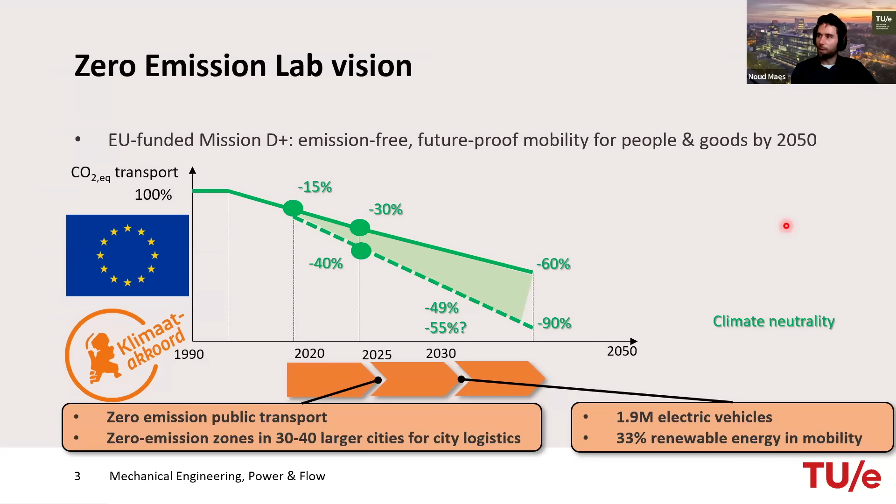I think it is relatively clear for most of us what our goal is here. In our zero emission lab, we have the vision that aligns with the EU-funded Mission D+, which is emission-free, future-proof mobility for people and goods by 2050. That is associated with several targets, among which are zero-emission public transport, but also zero-emission zones in larger cities. That goes hand in hand with the introduction of electric vehicles, of course, but also renewability of energy in mobility.

Associated with that, specifically for heavy duty transport, we need to look at sustainable fuels in order to achieve those goals. In our lab, we have something that we coin ICE 0.0 - internal combustion engines 0.0 - where we focus both on zero impact greenhouse gas emissions as well as zero impact pollutant emissions. For the greenhouse gas emissions, you have to look at the fuel side. You want to avoid fossil carbon - that's what you want to avoid in order to have zero impact greenhouse gas emissions. That means we look at either hydrogen and ammonia as carbon-free fuels, or advanced biofuels and advanced electrofuels, fuels generated by renewable electricity, from the fuel perspective.

On the other side of the coin, we have the zero impact pollutant emissions. That's partially related to the fuel again, but also largely based on the engine that you're using. That means, of course, that we're targeting zero impact NOx, soot, unburned hydrocarbons, and CO emissions. We believe that the way to do this is to use a combination of ultra-efficient internal combustion engines and sustainable fuels, to accelerate the greenhouse gas emission reduction in heavy-duty transport.

Some of the key scientific challenges associated with this are the formation of mixtures inside the cylinder, but also to shape the heat release inside the engine and to control this heat release as a function of time. In addition, we also believe that we need to have certain fuel flexibility in order to meet up with specific supply and demand.

The way we do that in our zero emission laboratory - this is an initiative which is joined by the university, TUE. We also have, in our board and program advisory committee, TNO, which is a Dutch research institute. We have DAF, the local truck manufacturer situated in Eindhoven as well. And then in our board and program advisory committee, we also have chairs for people from Shell.

We do three different things in our lab, in our initiative so to say: concept studies on engines, advanced typically optical experiments on combustion, and advanced numerical simulations for the projects that we do. This means that most of the research we do is based on the combination of experiments and numerical simulations and the comparison of those.

I will not focus on this part of the research in our initiative today, but rather I will talk about some concept studies and some optical experiments on combustion. Here are also some people associated with the research in our lab, and of course we have indispensable help from many support staff members, as well as students.

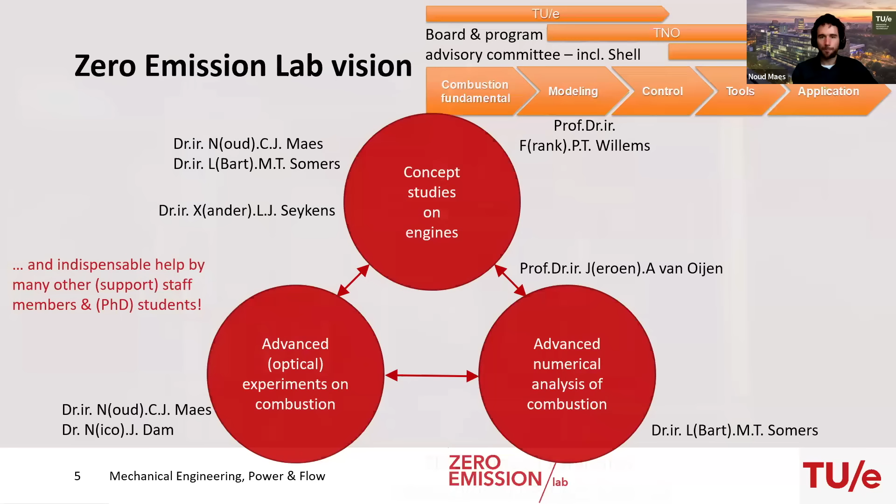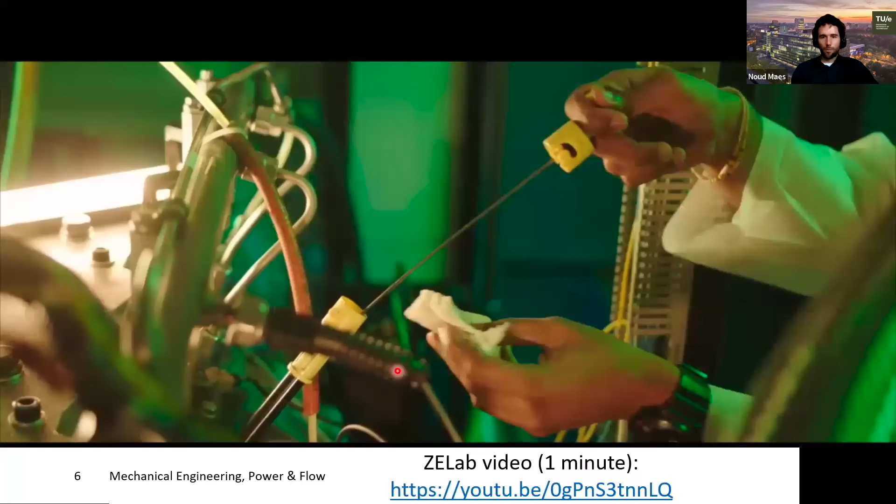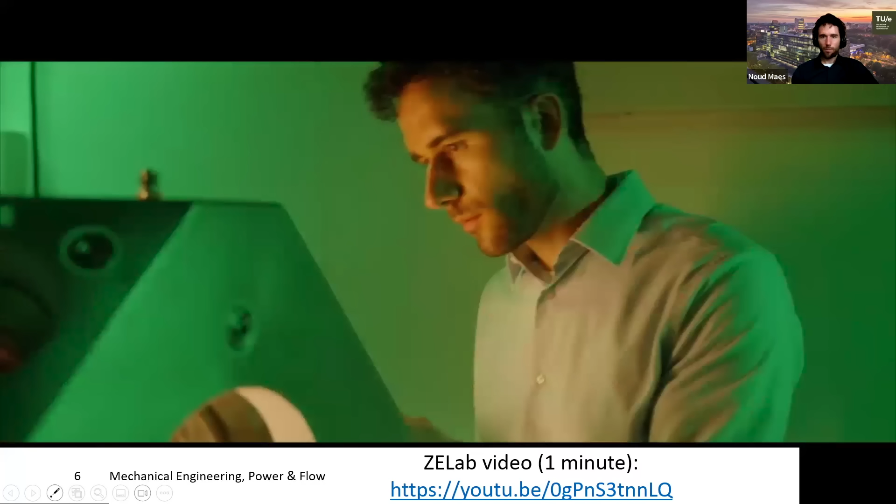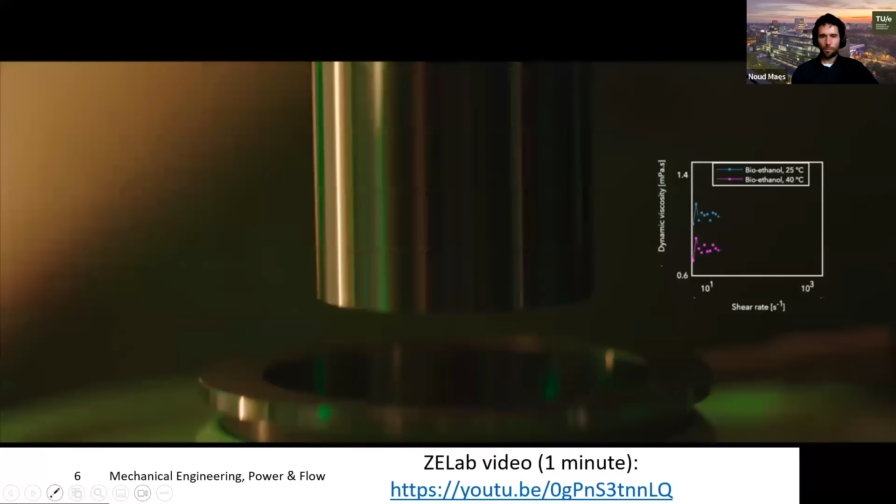The pursuit of a sustainable future. It's a journey on a road we discover along the way. No clear destination, no beaten track to follow, and hardly any time left on the clock. All we know for sure now is we simply cannot make it without internal combustion engines. Especially in heavy transport, these engines are indispensable. Here, in the Zero Emission Lab, we explore, we test, and we log our journey. Our research focuses on green fuels and clean engines. More efficient, less emission. Simple as that. Yet one of the biggest challenges of our time. Let's dive deep into the most fundamental problems we can find. Care to join us?

As already mentioned, we host several experimental setups in our lab. I'm showing most of them on this graph, where the y-axis shows how close they are to real-world application, meaning very applied, an actual engine. The x-axis shows the fundamental nature of the research, meaning that on the bottom right we simply have combustion at quasi-steady conditions to study different fuels.

I'm highlighting in blue the setups we use for ultra clean engine concepts, looking at different combustion concepts, while in green I'm targeting the setups that allow us to study different types of fuels. In many cases, especially in the middle, we can combine those two properties. I truly believe some of these setups are unique even on a global scale, leading to unprecedented research capabilities in our lab.

I will talk about, or at least introduce, a couple of these setups before going into some of the results that we have obtained in the past years in our lab.

To start off with, we have several setups that allow us to analyze the lubricity, the stability, and the elemental composition of our fuels prior to testing these fuels in our engines. That's because we want to understand whether these fuels are applicable and usable in our engines, and we want to prevent damage to our other setups. We also have to realize that some of the fuels we test have limited batch sizes, specifically for the biofuels and e-fuels.

Then we have several Hatz engines. These are single cylinder diesel generator engines, equipped with emission and in-cylinder pressure analysis to study combustion. They are relatively robust, cheap, and fuel flexible in our case for direct injection compression ignition engines. We even have 3 of these placed on moving frames that we use in our courses for bachelor students, where they can test different fuels and analyze how sustainable these fuels are, and write reports about that.

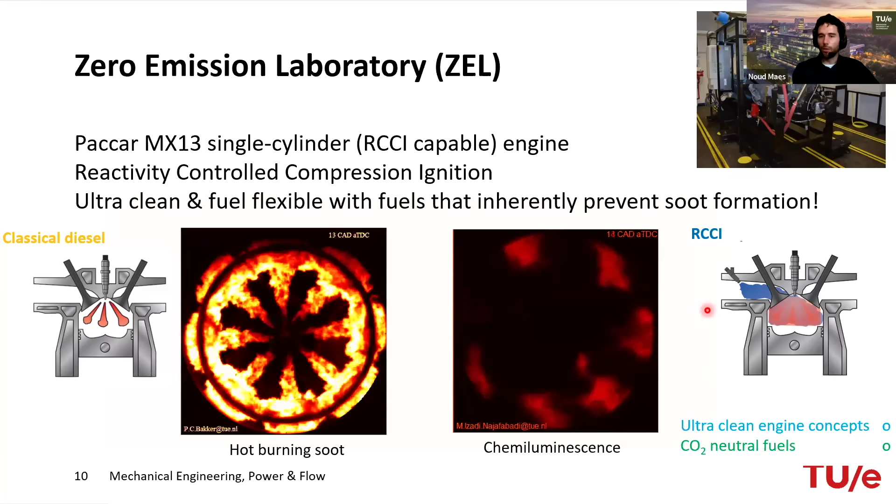A bit more sophisticated is our PACCAR MX-13 single-cylinder reactivity controlled compression ignition capable engine, shown in the picture on the top right. This is a modified single cylinder engine that allows us to study different combustion concepts, where on the left hand side we see the classical flame throwers caused by classical diesel combustion, while on the right hand side we make use of two different fuels, one low octane, one high octane, to perform reactivity controlled compression ignition.

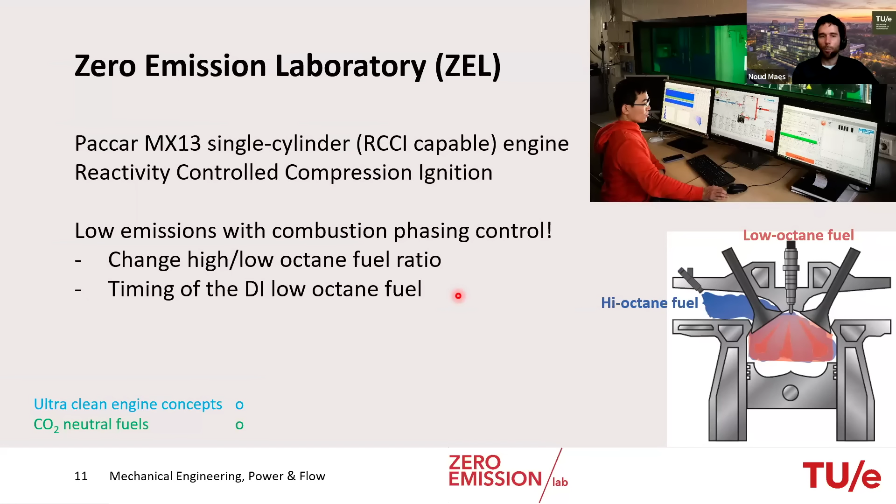The idea here is that we try to achieve low emissions with combustion phasing control. We have our high octane fuel injected in the intake, and our low octane, more reactive fuel, injected directly into the engine. The ratio between this, as well as the timing of the direct injected low octane fuel, allows us to facilitate combustion at the right moment without having direct coupling between the moment of injection and ignition of that fuel, the compression ignition.

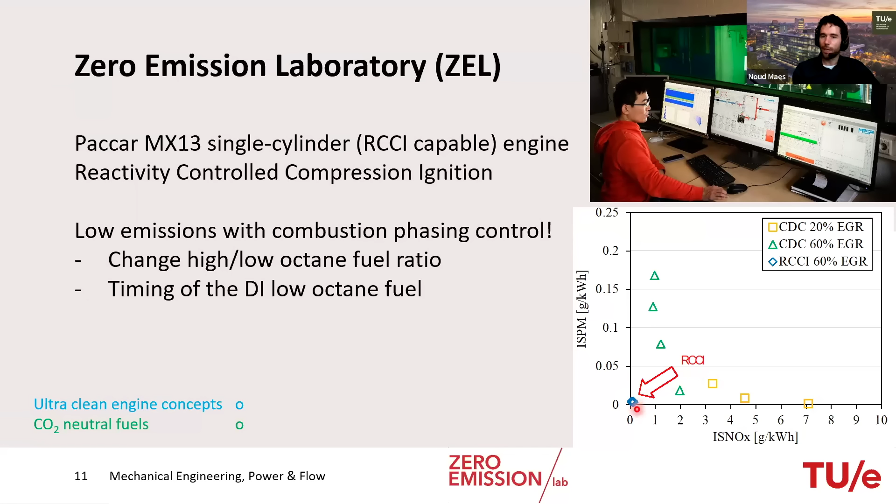In terms of soot emissions on the y-axis and NOx emissions on the x-axis, this typical trade-off that we see for classical diesel combustion, where we either have high soot or high NOx emissions, is really broken, and we arrive at this near zero soot and NOx emission area for RCCI type of combustion.

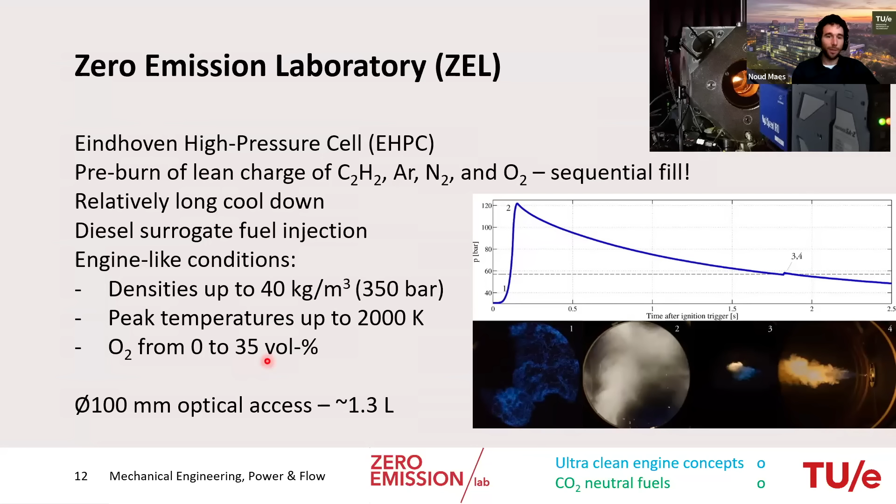So there's a relatively long cool down period. And when we cross the conditions in which we are interested in for our engine type conditions, we inject our fuel, and we can then study that with the optical access. We can arrive at densities up to 40 kilogram per cubic meter, pressures of 350 bar, temperatures of 2000 Kelvin, and based on the amount of oxygen that we fill during this pre-burn, we can arrive at 0 to 35% oxygen after the pre-burn, in which we inject our fuel. That means that we can study inert vaporizing conditions, or conditions where we do have oxygen for combustion, oxygen enriched conditions, if you wish.

Well, that allows us to visualize the vapor phase fuel, the liquid phase fuel, but also species distributions using laser-based diagnostic techniques, as well as chemiluminescence, for instance, or we can also study soot in the case of carbonaceous fuels.

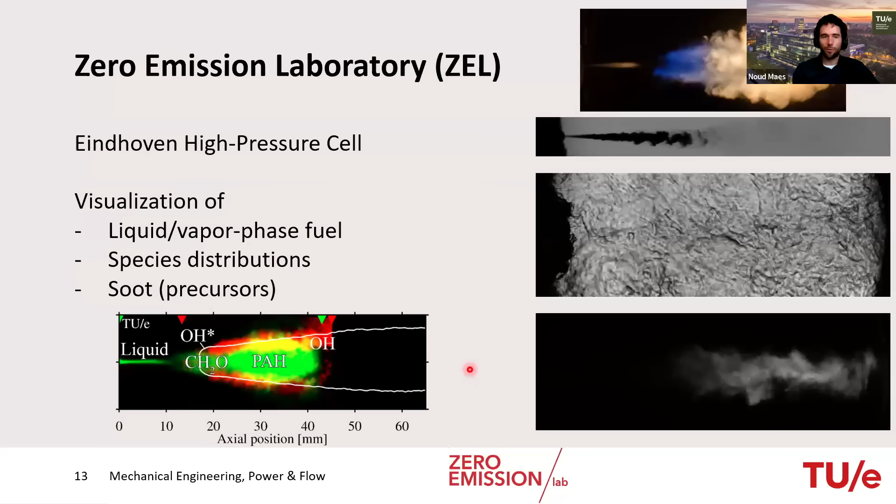We have a smaller constant volume vessel with limited optical access. That is a combustion research unit, which is a commercial ignition quality tester. This one has a volume of about 0.4 liter, and here the conditions are reached by preheating compressed gas that is admitted to the chamber. In this case, we can arrive at engine-like conditions of pressures up to 60 bar, peak temperatures up to a little over 1000 Kelvin, and oxygen percentages again between 0 and, in this case, 21% oxygen.

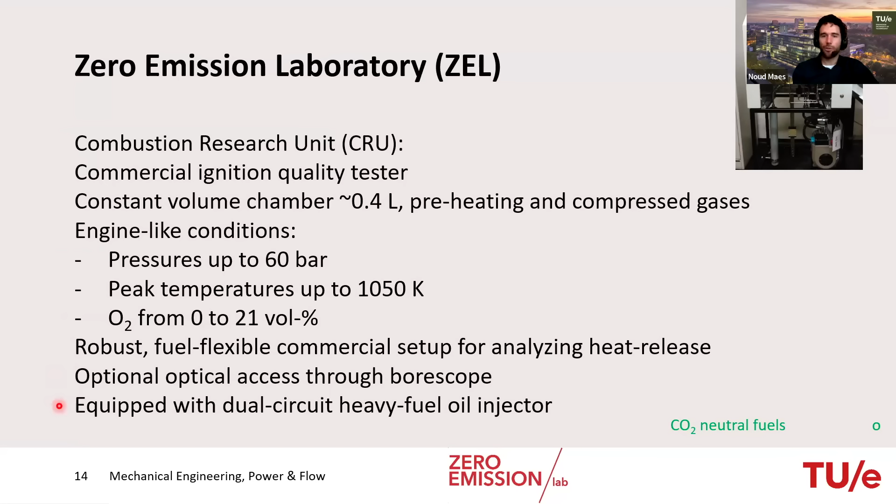This is a robust and fuel flexible commercial setup for analyzing mostly the heat release that is caused by the injection of our reactive fuel, and there's a limited optical access point through a borescope from the bottom of this small vessel. It is also equipped with a dual circuit heavy fuel oil injector that allows us to study very viscous fuels that are more applicable to, for instance, marine applications.

Then we have our Eindhoven low pressure cell. This is a small version of the vessel introduced earlier. In this case, the volume is 1 liter. And in this case, we do not have a pre-burn, but instead we fill the vessel simply with compressed gases, which can be nitrogen, helium, argon, or mixtures with oxygen, of course. The pressures can go up to 50 bar, but this is all at room temperature.

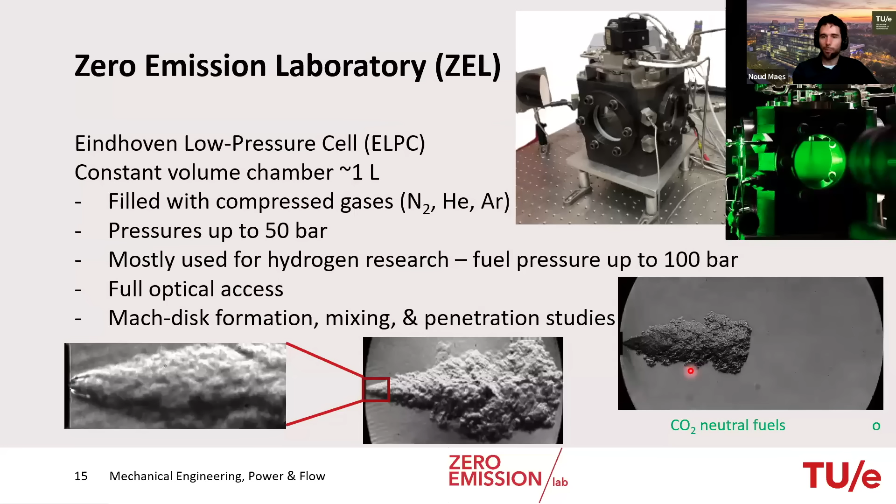So far, we've mostly used this for hydrogen research with a fuel pressure up to 100 bar, where we still have full optical access, and we can study, for instance, the Mach disk formation of hydrogen jets, but we can also do mixing and penetration studies at room temperatures.

Then one of the final setups that I would like to introduce is our momentum exchange setup. In this case, this is a small force sensor with a plate mounted in front of it. And that allows us to study the force that is generated by an injector. That can be a liquid or a gaseous injector that's injecting onto this plate, and then we measure the force introduced by that injection, and that allows us to determine essential parameters for modeling fuel injections.

In combination with a syringe pump, we can do that for liquid fuels, and also simultaneously acquire the mass flow of the injector up to pressures of 2000 bar, 200 MPa. But currently we've been using this a lot for hydrogen injections, where we can use up to 200 bar gas bottles to study the momentum generated by a hydrogen injector.

And then the final setup that I would like to introduce is one of our optical engines. This is an engine that we're currently converting to hydrogen operation as well. In the base, this is a single-cylinder 2-liter compression ignition engine based on the Proteus Ricardo base, equipped with a DAF MX-13 liner, piston, and engine head, and it makes use of an extended piston, a Bowditch design, shown schematically here.

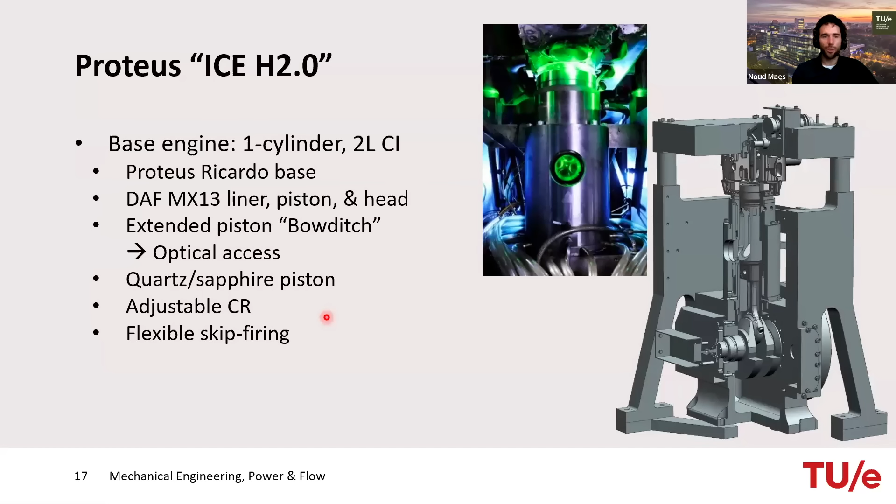Some of the current and recent projects I will highlight today include the Smart CHP, Combined Heat and Power project by Dr. Wang, who defended his PhD last year in May. His PhD project was on the use of fast pyrolysis bio-oils in engines. I will have a couple of slides on the Argon power cycle, where Dr. Max Peters defended this year in May.

Some of his optical studies on hydrogen jets in nitrogen and argon environments. Some of the work by Dr. Wang will also be included, who did a postdoc within this project after his PhD. Then I will talk a little bit about future fuels studied by our China Scholarship Council student, Dr. Sun, who defended last week, in fact. So that's on biofuels and oxymethylene ethers, OME fuels.

And then finally, two more hydrogen projects: first, the rebuilding of our optical engine for hydrogen use by Stan Latten, and a hydrogen pre-chamber study by Ralph Maas in the HyUse project.

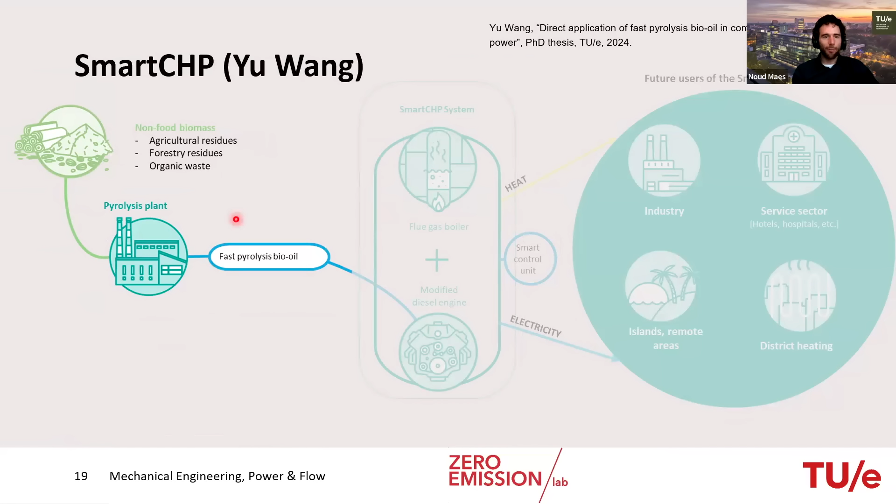So Smart Combined Heat and Power by Dr. Wang. The idea here is that we use different types of non-food biomass, particularly residues. We convert these into pyrolysis oils in pyrolysis plants. And then the idea is to use this in a smart combined heat and power system, where part of it is directed towards the flue gas boiler.

But our focus in this project was to look at the use of FPBO, fast pyrolysis bio-oils, in a modified diesel engine. The technical goals for this project were to have a small-scale unit between 100 and 1000 kilowatt electric in terms of power. The heat-to-power ratio should be flexible between 1:1 and 10:1, so more heat compared to power. The overall combined heat and power efficiency should be beyond 85%, and the greenhouse gas emission reduction compared to fossil fuels should be above 80%.

Some of the applications or future users are listed here: industry, remote areas, service sectors, or district heating. But of course, the challenge here is that FPBO, compared to diesel, is rather viscous, 15 times the viscosity. It has a relatively low energy density, partially because of the high oxygen and water content. It may have some impurities in terms of particles, and it is also strongly acidic.

That means that in engine applications, we didn't know how the ignition properties and combustion characteristics would be, but also we had to take care of the corrosivity, the nozzle clogging, and the poor ignitability relating to this first point.

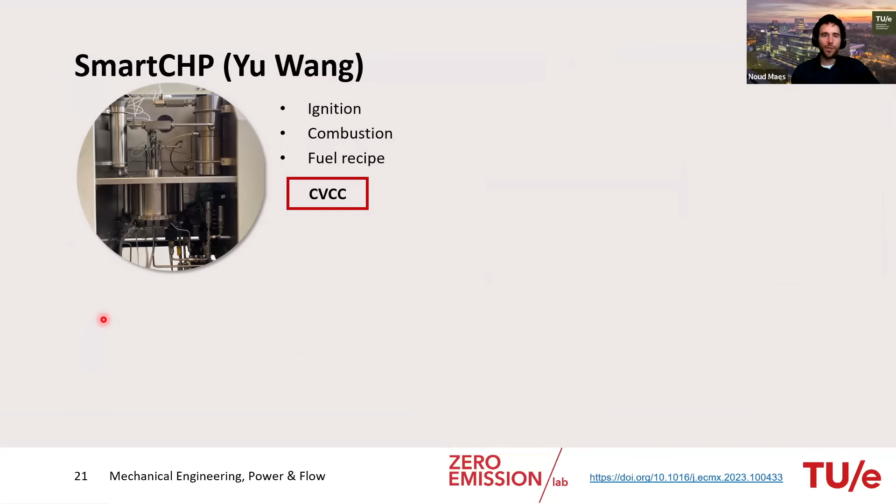The idea was to study this in a three-way approach. First, we used one of our constant volume combustion vessels in this study. We also did some modeling, looking at a two-stage Lagrangian model. And then we did our engine testing to look at durability, the emissions, and the efficiency of the fuel in this engine.

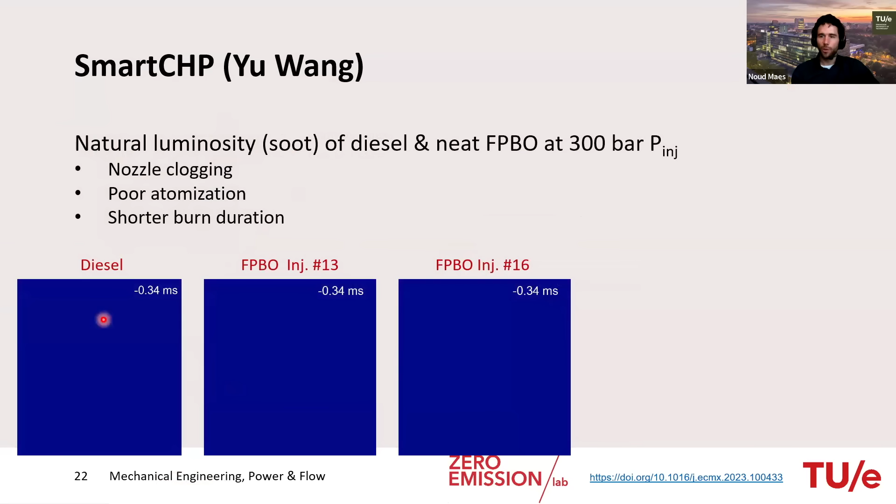First, we tested this in our constant volume vessel, looking at the natural luminosity of diesel and FPBO. We quickly realized that after 13 injections, our nozzles were already clogging, as visible here. And after 16 injections, even more of the holes in our injectors were clogged, meaning that we really could not even inject fuel anymore at some point.

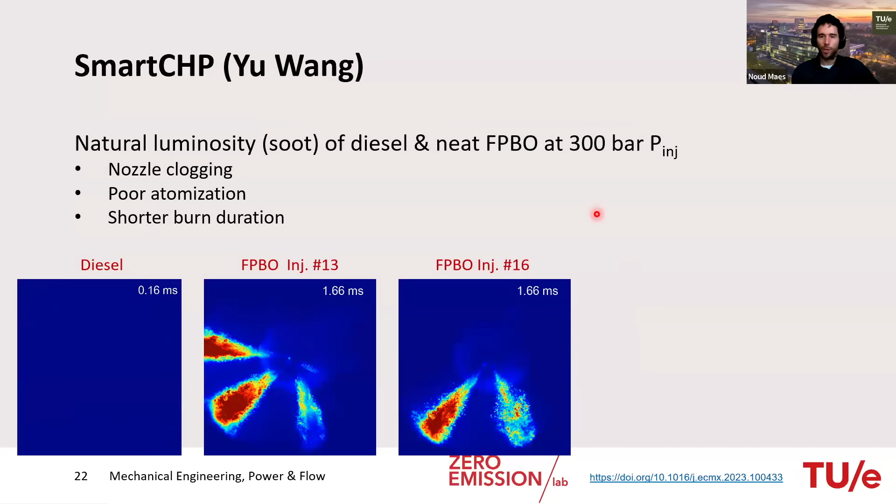That already improved the nozzle durability a lot. It also improved the atomization, but particularly when we added ethanol, in terms of 30% ethanol with FPBO, we further improved the atomization, reduced the sooting tendency even more, and slightly shortened the ignition delay of our fuel.

We tried to understand this further using a two-stage Lagrangian model specifically built to simulate spray combustion. This is a minimalistic flow model, a 1D entrainment model with two different reactors, perfectly stirred reactors with transport between them.

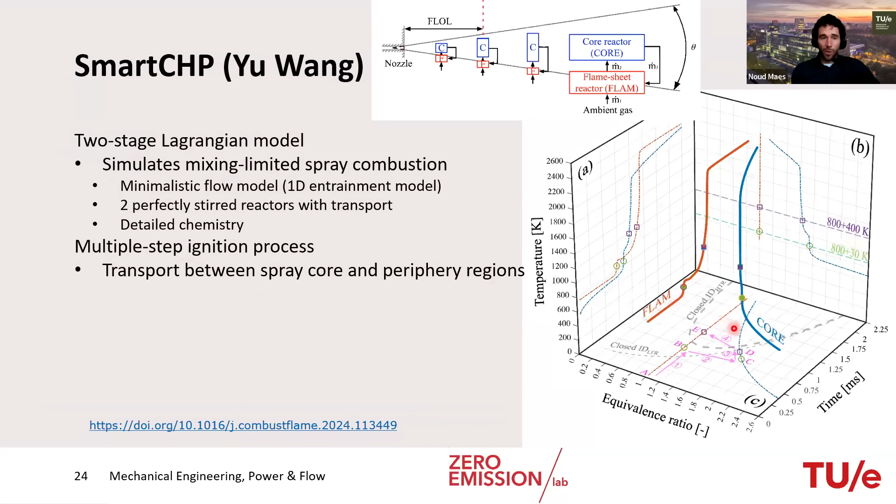And then we could use detailed chemistry to resolve combustion. With this model, we were able to show that our fuels had a multi-step ignition process with transport between the spray core and the periphery regions. We validated this model using well-known conditions from the engine combustion networks, so-called spray A conditions.

The conclusion was this is a very powerful tool to investigate spray ignition processes. We then applied it also to FPBO and blends with ethanol, and we saw that we needed rather high temperatures for the ignition of our FPBO ethanol blends, but ethanol specifically promotes the second stage ignition of our fuel.

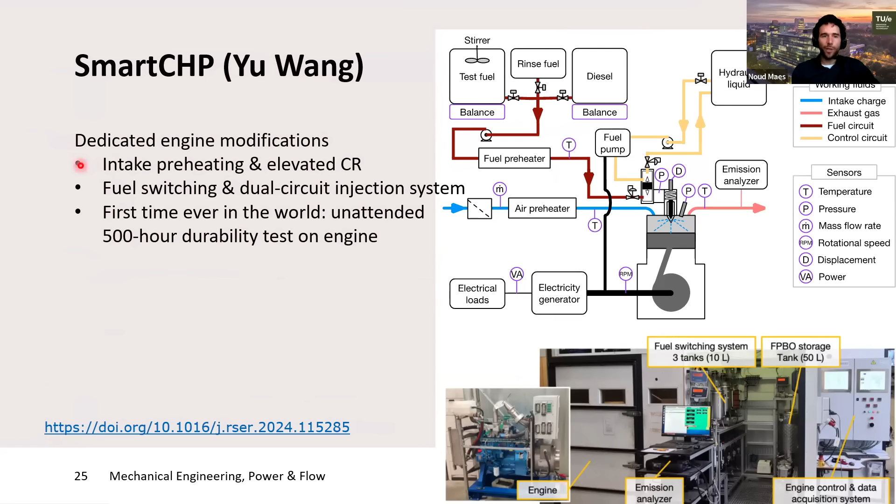Then finally, Dr. Wang also did dedicated engine modifications to run an engine on FPBO. We had to intake heat the engine and elevate the compression ratio. We implemented a fuel switching dual circuit injection system to make sure there is no contact of the FPBO with some parts of the injector.

These modifications are schematically shown here on the right-hand side. For the first time ever in the world, we managed to do unattended operation of 500 hours durability on an engine with pure FPBO. That was a great success.

We also showed that the efficiencies and the emissions were actually better than operating the same engine on diesel. We improved the thermal efficiency, net indicated efficiency, because of the faster burning rate at these conditions with FPBO. We also showed lower NOx emissions, probably because of the addition of water to the fuel, but we did have slightly higher CO emissions compared to diesel operation.

Then I want to switch gears and talk a little bit about the Argon power cycle, which was worked on by our former PhD student, Dr. Peters. The traditional situation is shown here.

So we have an engine that runs on air, oxygen and nitrogen, and then we inject our fuel, and then we have our exhaust gases with compression ignition. But the idea here is that instead of air, we use argon, and we use this in a closed loop.

And the reason for using argon is that it's the cheapest monatomic non-toxic gas, and ideally we recirculate this so that we do not have to provide a constant flow of argon to an engine and lose that to the environment. Well, of course, the way to do that is by using hydrogen as a fuel.

Because if we then have a hydrogen and oxygen reaction, we form water. We can condense that, which makes it easy to separate from the argon so that you can recirculate the argon in the engine.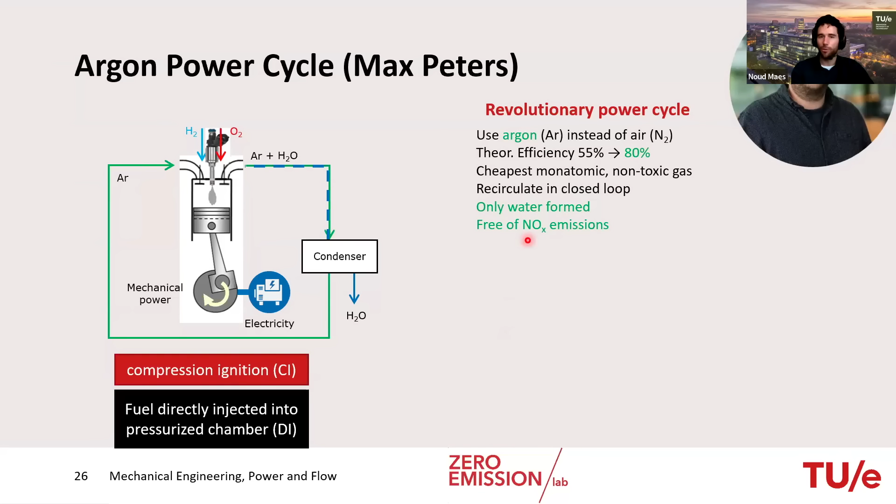And that'll also allow us to operate free of NOx emissions because, well, there is no nitrogen. That means the Argon power cycle enables pollution-free power production and very cost-effective hydrogen energy storage and utilization on site.

Well, we first characterized injectors. For this work, we used Bosch HDEV 1.x injectors. We used several different versions where we had orifice diameters ranging between 0.55 millimeter and 0.65 millimeter, and we modified the lift of the needle and the swirling plates inside these injectors.

With the traditional injector, we did a modification of the injector to open it up on the sides to visualize with optical techniques the injector needle itself, and we managed to visualize that this needle would have a lift of about 75 microns.

We then validated this using laser Doppler vibrometry in our lab as well, where we removed the back part of these injectors, placed a small reservoir with an optical window there, and that allowed us to study the lift on the back side of the needle while operating the injector with fuel.

And there we confirmed this lift of between 73 and 88 micron while operating at different fuel pressures. We also did CT scans of the injector, noticing that the smallest area for the gas to pass was around the needle lift area over here in the injector, all the way here in the front as well.

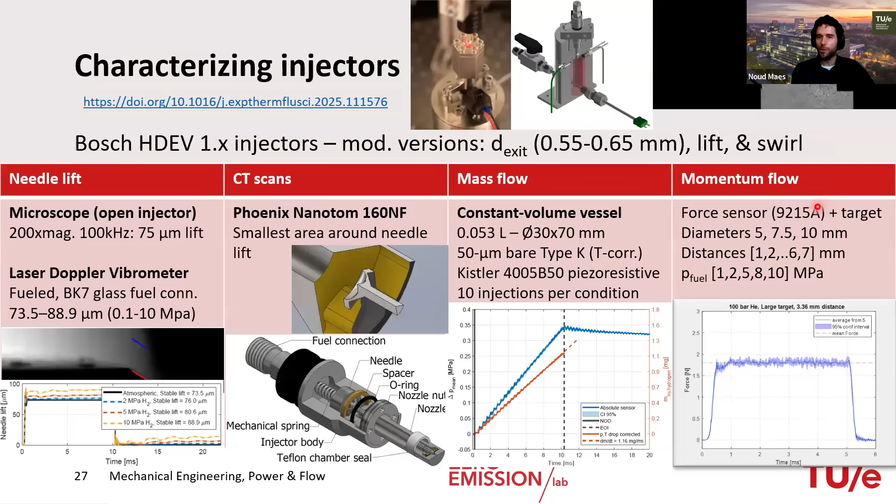We did mass flow measurements in a dedicated, very small constant volume vessel that I did not introduce before, where we also installed thermocouple measurements to correct for the temperature increase of the injection, to characterize the amount of mass being injected with every hydrogen injection. And then finally, the setup that I did introduce, the momentum flow measurement, where we did force sensor measurements to characterize the momentum generated by these injectors.

Here are some of the conclusions. I won't go into a lot of detail here, but what we notice is that there is a significant loss of the flow coefficients inside the injector. So the discharge coefficient, shown in this column, shows that for our prototype injector that we had initially, we would lose, let's say, half of the energy, more or less. But we also noticed that if we remove the swirler plates inside these injectors, or if we increased the needle lift, then we would be able to reach higher discharge coefficient values, increasing the mass flow of the injectors. Well, we then studied the jet penetration of these hydrogen injectors in our smaller low temperature pressure vessel.

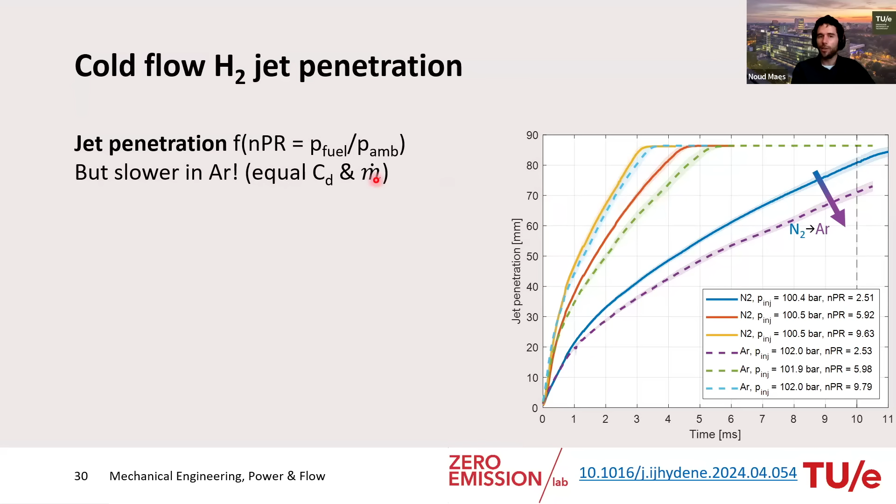And therefore, with different injection pressures, you still get the exact same jet behavior because the nozzle pressure ratio is the same. What does change the situation is if you move from nitrogen ambient to an argon ambient, because then you notice that the jets move much slower, but you still have the same discharge coefficient and the same mass flow. That is, of course, caused by the difference in density. So if you then correct for the density between argon and nitrogen, you get a ratio of about 1.4, and you get very similar jet behavior again.

We also did quantitative mixing studies. For this, we used Rayleigh scattering for gas jets. The equation simplified of the total relationship for Rayleigh scattering is shown here. The idea here is that you get both intensities of the jet as well as the ambient in a single shot, shown here with a color DSLR camera on the right hand side. You have your laser entering the vessel from the left-hand side, so you have the Rayleigh signal in the ambient, and then you have the Rayleigh signal in the jet itself.

The bad news is that Rayleigh scattering for a hydrogen jet means that the Rayleigh cross-section of nitrogen or argon and hydrogen is very close to one another, and that means your signal-to-noise ratio, especially compared to, for instance, N-heptane gas, is very low. That means you really have to optimize your optical system using a backlit CCD camera, a fast lens, and well-chosen filters for both the light as well as for the particles inside the setup.

One of the assumptions you need in order to get to this relationship is that the number density of the ambient as well as the number density in the mixture are equal. We validated this by performing argon into argon injections, injecting argon from our injector into a vessel filled with argon, because then the Rayleigh cross sections are identical, giving a direct measure of this number density. This shows that outside of the Mach disk area, which is only a couple of millimeters in terms of nozzle pressure ratio representative for engine operation, there is signal close to the nozzle inside the barrel-shaped shock, but outside of that, the number density equal to 1 assumption holds, and that allows us to do quantitative Rayleigh scattering measurements in our jets.

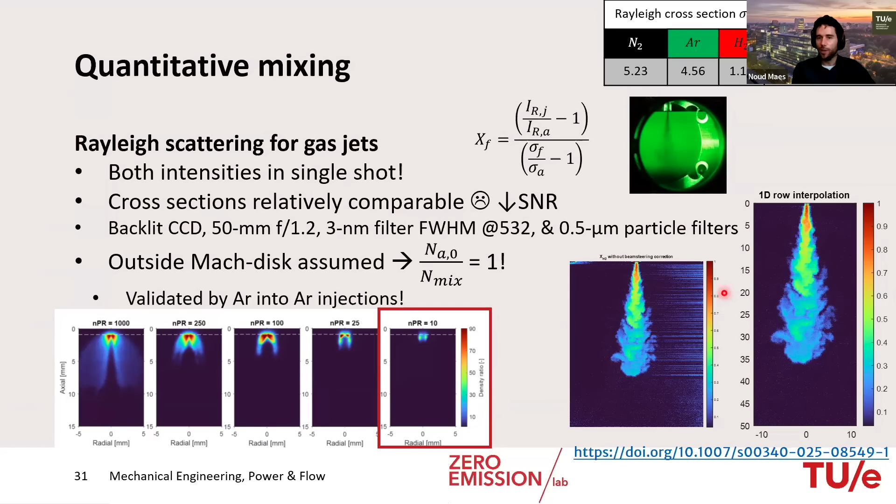Here you see the initial results of Rayleigh scattering, and then if we do a 1D row interpolation to correct for the beam steering inside the jet itself, we get images like this one on the right-hand side.

We also did a second study where we wanted to quantify mixing of hydrogen using inverse laser-induced fluorescence with an ambient tracer, seeding the ambient of a vessel. We used both toluene and acetone to study the LIF signal and the mixing with the jet. This was a collaboration with IFP in France, with Michele Bardi and Hugo Quintens at IFP. For toluene, we had to use an intensified camera because it was using UV.

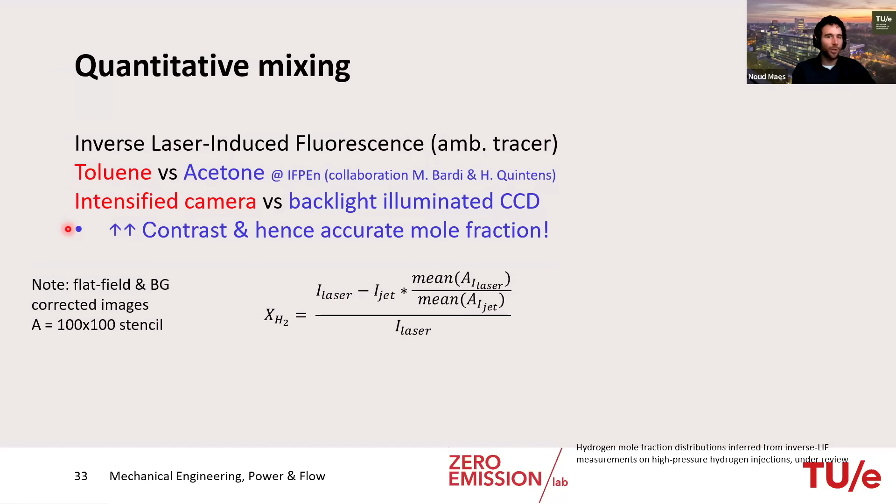Toluene results in LIF signal in the UV range, while for acetone we could use our backlight illuminated CCD camera again. We eventually chose this setup because it enhanced our contrast a lot, which resulted in much more accurate mole fractions using this equation on the right in the center of the screen.

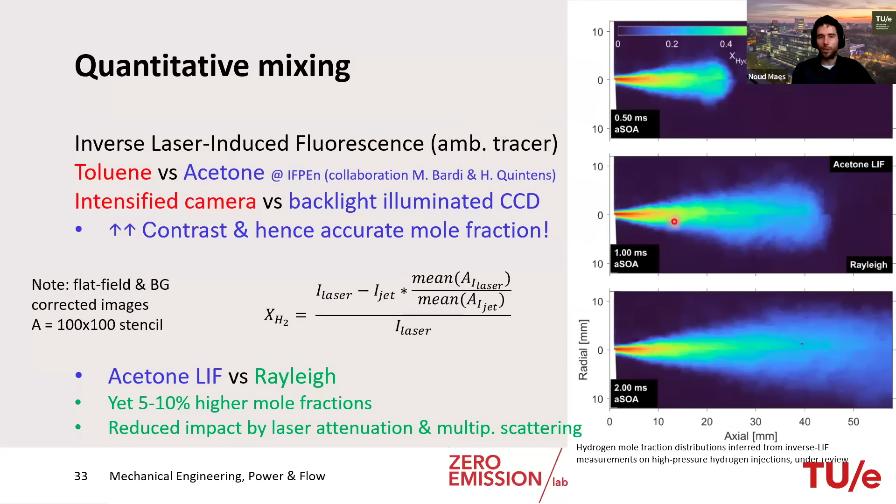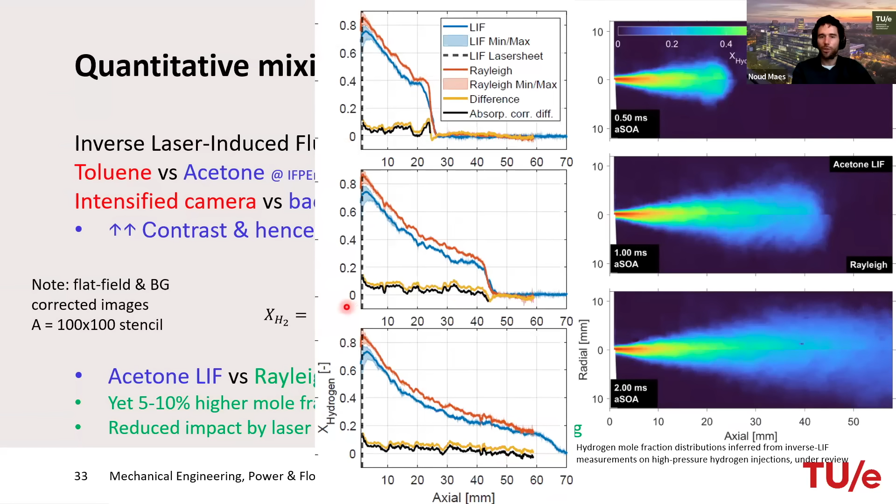We find 5 to 10% higher mole fractions for Rayleigh, and we also see a reduced impact of laser attenuation and multiple scattering in our Rayleigh results. This is also shown in these quantitative centerline plots of signal versus axial distance from the nozzle, where Rayleigh is always a little higher than the LIF signal. We did an additional absorption correction, which reduced the difference slightly, but we never got to the same values as with Rayleigh scattering.

Finally, we also did hydrogen combustion experiments in our Eindhoven high pressure cell. I will not go over that slide, but I will show a couple of nice movies if they run.

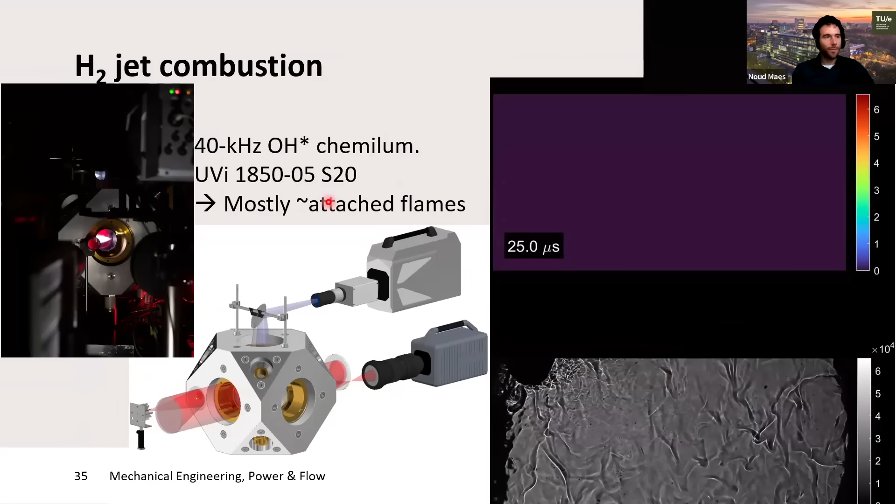See if that works. Okay, that may not work. Okay, for some reason my presentation... all good to run. Yeah, I'm still audible, I guess. Yes you are, but I guess the movies I was trying to show are... okay, relatively. Let me try that again. Yes, that works, go ahead. Otherwise I will skip this slide. Switch this one, I still have to reshare my screen. Go. Share. Okay, I guess I should be visible again. Perhaps you can confirm whether the slide is now running again. I don't hear anything. I see the video, yes. All right, perfect, thanks for confirming.

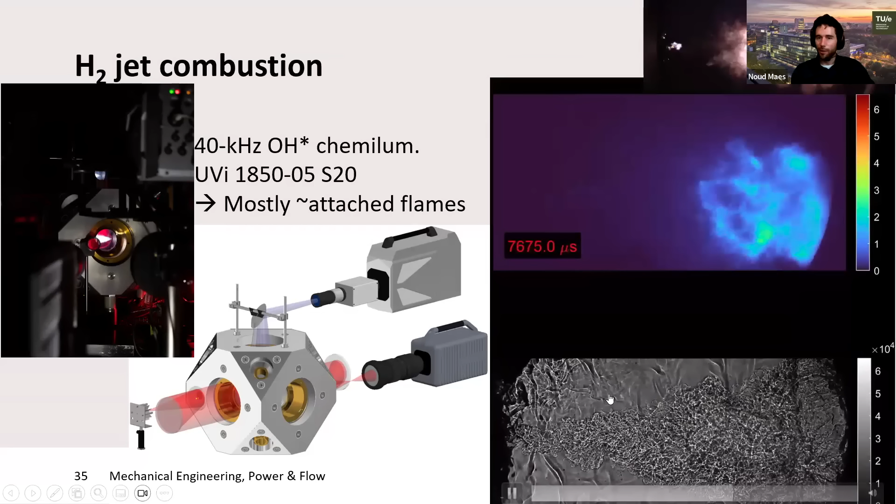We did hydrogen combustion experiments in our constant volume vessel. Here on the top right, we see a true color image, here we see high-speed chemiluminescence, and on the bottom we see Schlieren measurements done to visualize the differences in refractive index caused by differences in density in our injections. We did these simultaneously to study these hydrogen injections in great detail.

By this, we created a large database of hydrogen injections into different atmospheres, containing nitrogen or argon with or without oxygen. We studied different ambient temperatures ranging from 900 to 1400 Kelvin, different oxygen percentages ranging between 0 and 21%, and used these different optical diagnostic techniques.

Here I'm showing simply the correlation between the ignition delay measured based on the pressure measurements, as well as based on the chemiluminescence measurements.

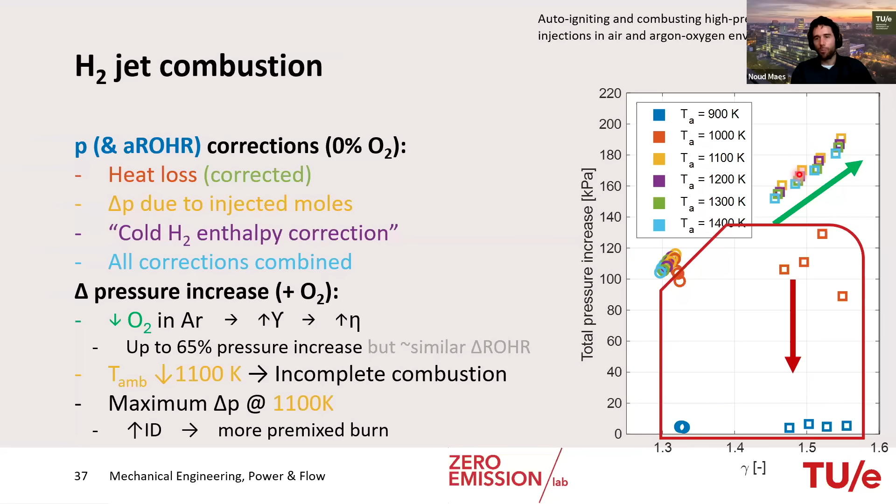The different colors represent the different ambient temperatures. We need at least a temperature of 1100 Kelvin to properly ignite or have complete combustion of our hydrogen inside this vessel, meaning that the cases at 1000 Kelvin only show partial heat release and incomplete combustion. The maximum pressure is reached at 1100 Kelvin, because the ignition delay for these cases is the longest, meaning more premixed burn and therefore less heat losses.

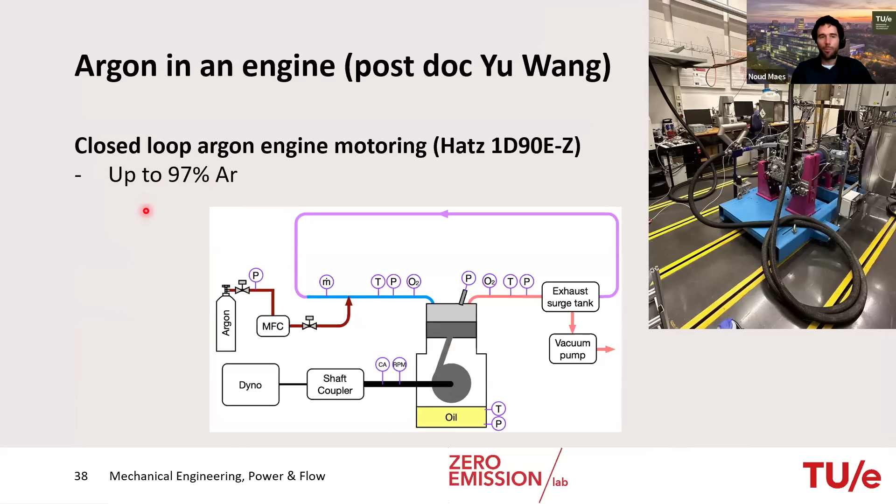Then finally, in one of our Hatz engines, we also did closed loop Argon engine motoring. We had Argon connected to our engine in a closed loop where we recirculated it, but did not inject any fuel. Using this, with some gas losses from the engine itself, we were capable of running the engine up to 97% Argon.

All right, then I'll shift gears a little bit, talking about the PhD project by Zhongcheng Sun, who studied a pathway to sustainable fuels, looking at both short-term and long-term solutions in our setups. He first studied gas to liquid fuels as a potential any-power-to-liquid type of fuel for the future. He also looked at GTL blends with 30% biofuel by volume, FAME, fatty acid methyl esters. And he looked at a potential e-fuel, oxymethylene dimethyl ether, which has no carbon-carbon chains and quite a bit of oxygen between the carbon molecules, as shown in this figure in the center of the slide.

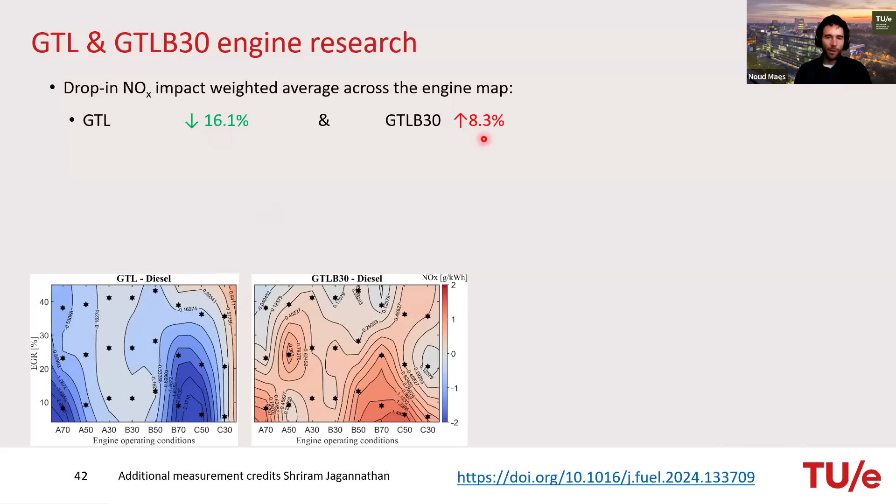GTL and GTL B30 blends, with 30% biofuel, are considered a nice short-term drop-in fuel for diesel engines. He showed that if we implement these fuels, here we see difference maps of GTL minus diesel and GTL B30 minus diesel in terms of NOx emissions. If you simply replace diesel by GTL, NOx emissions drop by 16%, but for a GTL mixture with 30% biofuel, they may increase by 8.3%. That's of course not a very fair comparison, because we typically need to optimize the engine based on the fuel composition, tailoring the operation of the engine to the fuel being used.

If you look at this based purely on the amount of exhaust gas recirculation in our engine, we notice that for GTL we can get a reduction of about 41.9%, while for GTL B30 we can arrive at a reduction of 55.5% in terms of NOx emissions, while adhering to the Euro 6 soot limits.

That's shown here for different operating points. The numbers on the x-axis represent the load of the engine, meaning 30%, 50%, and 70% load, while the letters A, B, and C correspond to different engine speeds. This shows that depending on the operating point of the engine, we need to increase or decrease the amount of EGR when we move from diesel fuel to one of these more sustainable fuels with a lot of bio components.

Another alternative for a slightly longer term solution would be OME. OME is a potential e-fuel, as mentioned before, which at the moment is relatively expensive. This brought us to the idea that if it's so expensive, do we actually need all of it? Or if we have a certain amount of this sustainable, renewable e-fuel, can we blend it with other fuels in order to gain some benefit?

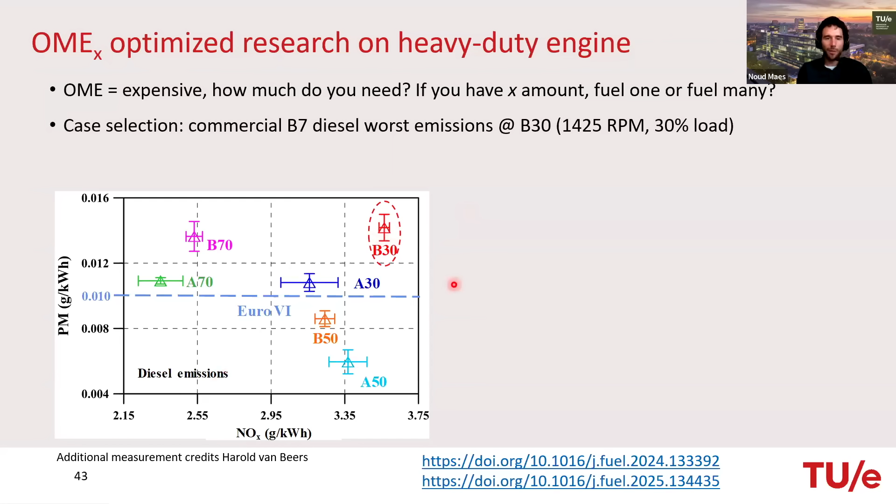For this, we selected a case on this soot versus NOx map that is relatively polluting. That's B speed with 30% load, which produces the most soot and NOx emissions across the engine map when running on diesel. That's the point we chose to optimize.

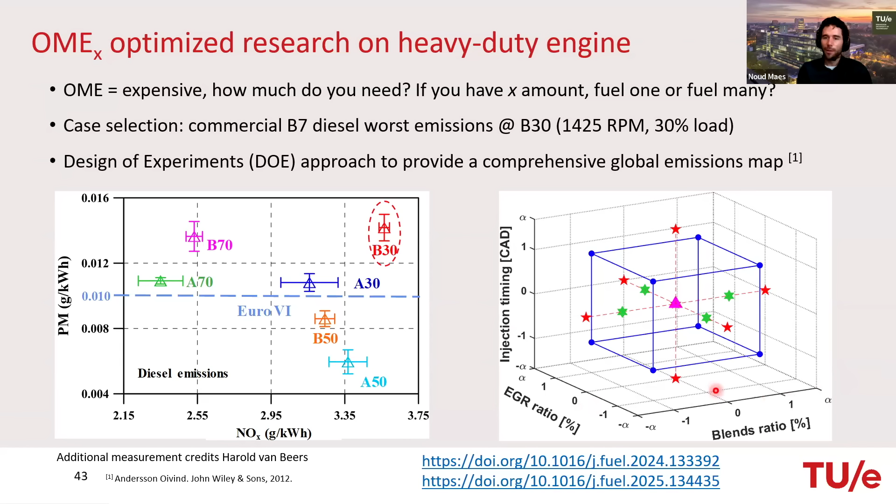We then used a design of experiments approach to provide a comprehensive global emissions map. Here we varied injection timing, the amount of exhaust gas recirculation, and the amount of OME in our mixture with diesel in order to find an optimum in terms of emissions and efficiency. That is shown here on this graph. I realize this is a very busy graph, but I'll try to explain it in a little detail.

Based on this map, we find that if we run our engine on this B30 condition, then based on Euro 6 NOx and Euro 6 PM emissions limits, we can get compliance without after-treatment if we run on 24% OME and EGR percentages above 37.2%. But if we do include some after-treatment system, which can be relatively simple compared to current diesel engines, even with only 12.5% OME we can get a significant benefit, reducing the amount of after-treatment needed, with only a small addition of OME to our diesel blends.

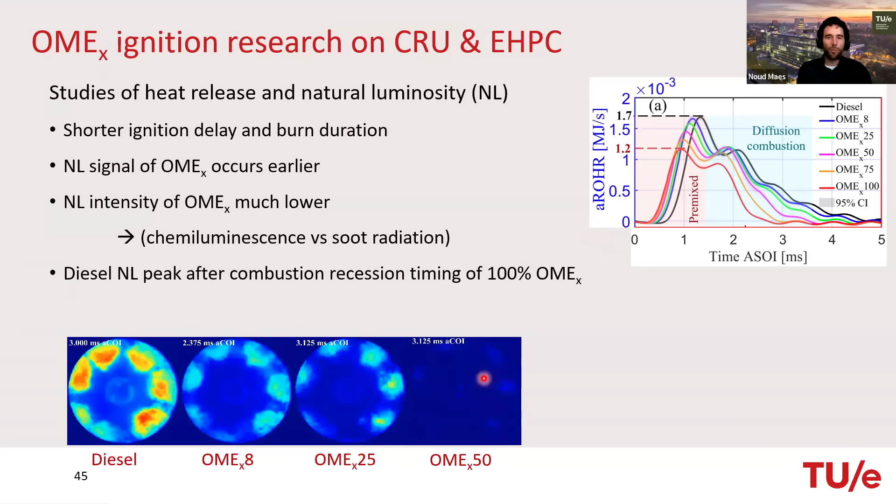We also studied some of this optically, and I won't go into a lot of detail here, but I'll show the heat release as a function of time. More importantly, here we see the natural luminosity caused by either diesel or increased fractions of OME. What we see is that if you increase the amount of OME, the amount of natural luminosity detected in such a combustion system is much reduced, because at some point you don't have any soot formation at all, and you're purely looking at chemiluminescence. That's also shown and visualized in these high-speed movies from our high-pressure vessel.

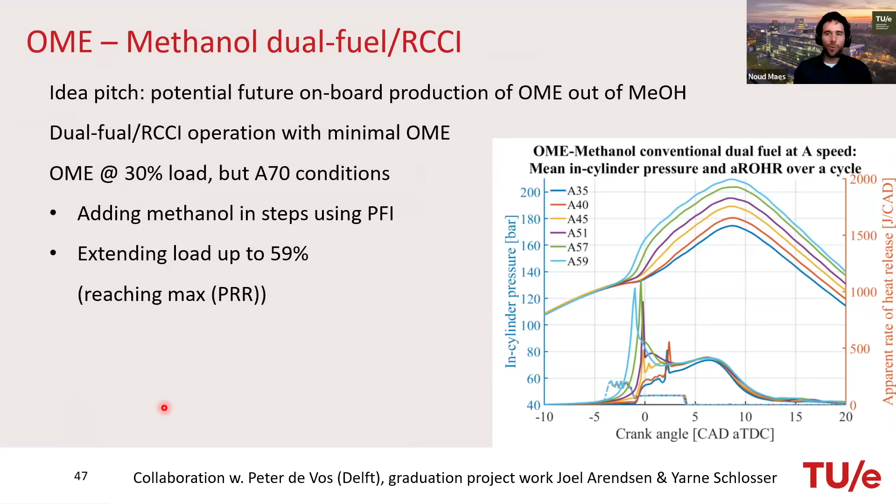I don't have much time left, so I will probably skip this study, which is a dual fuel study of different fuels, methanol and OME.

I would like to spend a couple of minutes talking about some current projects on hydrogen engines. We are revising and repurposing one of the optical engines I introduced before, with a 200 bar hydrogen pack located outside that is reduced to 40 bar before entering the lab. Using different pressure regulators and a boost pump inside the lab, we can reach up to 700 bar of injection pressure for direct injection hydrogen operation, even with the outside hydrogen pack at approximately 3 bar, so we can empty our hydrogen packs efficiently.

We're targeting a stepwise approach with our optical engine, starting with operation on diesel without hydrogen. Then we move to diesel-hydrogen dual fuel, with port fuel injection of hydrogen and ignition using a small quantity of diesel injection. We will then move to port fuel injection spark ignition of hydrogen, igniting using a sophisticated spark inside the engine itself. Gradually we move from low pressure direct injection of hydrogen towards high pressure direct injection with a late direct injection diffusion flame of hydrogen, as shown in the optical combustion vessel. This may be combined with turbulent jet ignition or pre-chamber assisted spark ignition, which is also the topic of the next project.

Something we have to consider when operating an optical engine is that we run it on skip firing. That means we reduce the heat load on the engine by injecting fuel only 1 out of 10 cycles, for instance, or 2 or 3 out of 10, instead of firing each cycle. That means EGR, the typical exhaust gas recirculation, becomes impossible because you dilute the exhaust gases with intake air. So we simulate exhaust gas recirculation by premixing air, nitrogen, and water using mass flow controllers.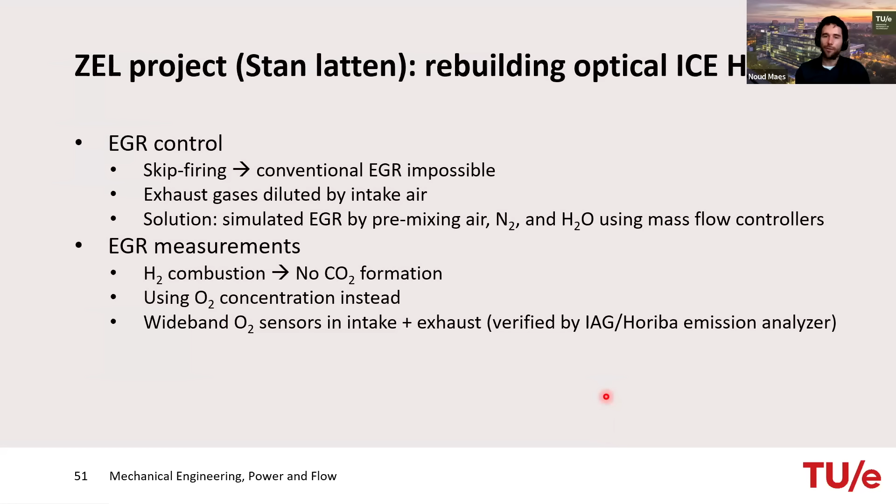We can still do EGR measurements, but for hydrogen that becomes difficult because normal EGR measurements are based on CO2 formation. So we've also installed wideband oxygen sensors in the intake and exhaust, which we verify in our system running on diesel using the CO2 formation method, to check whether the EGR percentages are correct.

Another relevant thing is still measuring emissions, because with skip firing, since you dilute the exhaust gases, you also underestimate the emission measurements. Skip firing further alters the heat losses because the engine cools down further, and reduces the amount of internal EGR since you have some non-fired cycles as well.

So together with our postdoc Furkan Akbulut, Stan Latten is now studying the impact of firing percentage on our metal engine, where we can do both full firing studies and skip firing studies. That's shown very quickly here.

Here I'm showing results of 10%, 20%, up to 100% firing of the engine, looking at heat release as a function of time. You can see the heat release scales with the fired fractions. At 10% fired, so 1 out of 10 cycles fires, there is a relatively large premixed burn, shown here in purple, because there's no internal EGR, meaning less exhaust recirculation inside the engine, and therefore a slightly higher premixed burn.

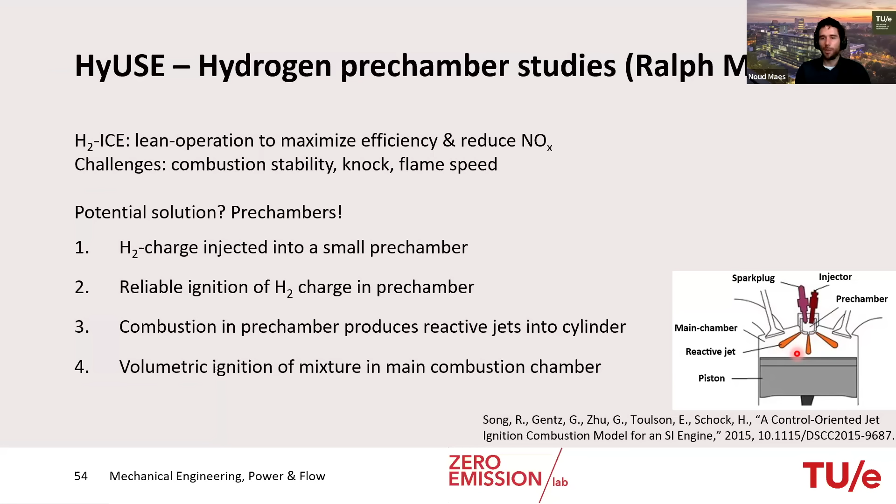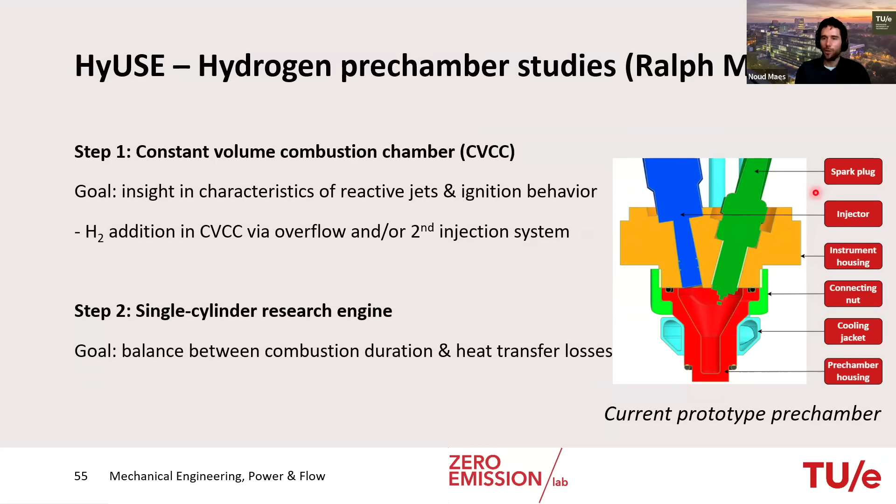We will use our constant volume chamber to characterize the reactive jets and the ignition behavior in different steps, so we can do overflow of the pre-chamber, as well as use a second injection system in the main chamber. Eventually we also target using our single cylinder research engine to find a balance between combustion duration and heat transfer losses in such a system. The current prototype is shown here on the right-hand side, where we also have pressure sensing equipment inside the pre-chamber itself.

All right, so that brings me to the end of my presentation. I realize I overstepped the time to some extent, so I hope that's not too much of a problem. But if there's room for questions, then of course I'd be happy to answer some.

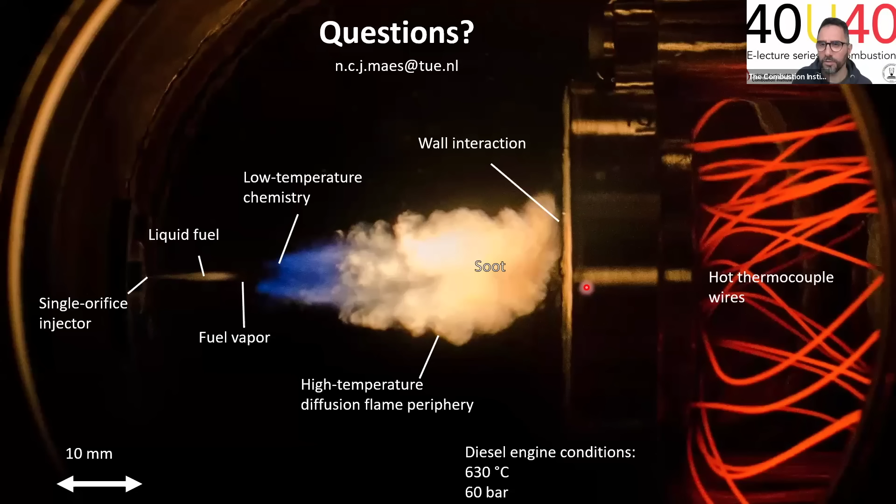Okay, thank you for the talk. It was really interesting, and it's quite impressive what everything you can do in your lab, and with the experimental part, it's really impressive to see that. I had the first question about the last couple of slides you showed about the hydrogen engine. Did you study the impact and the difference between EGR and water injection regarding emissions? And if so, which is best in terms of emission reduction? And is it interesting to study both of them at the same time or not?

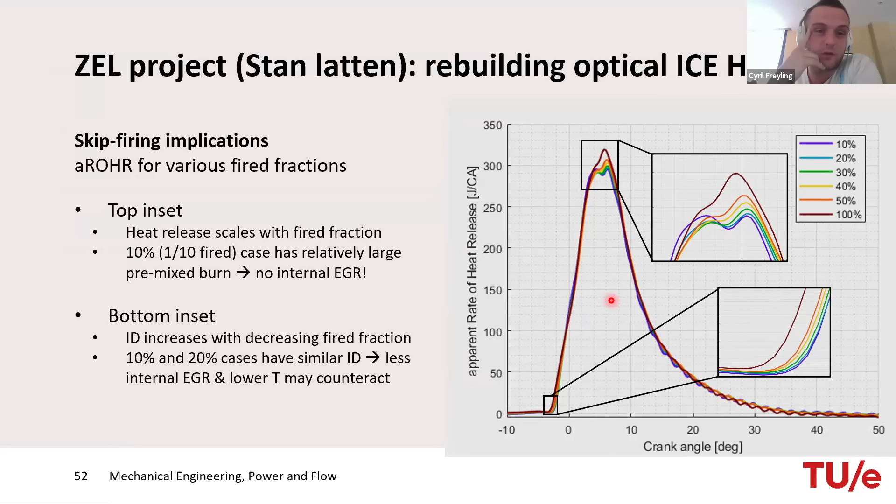Yeah, that's a very good question, in fact. In the design of our optical engine, what we are targeting, and that's probably shown here, is a water port fuel injection. The reason for that is mainly to reduce the in-cylinder temperatures to mitigate NOx emissions. But we haven't actually performed these experiments yet, because this engine is currently being rebuilt and repurposed by our PhD student. Meanwhile, he has been using our single cylinder metal engine, not the optical version, to look at the impact of skip firing. Last week we installed the hydrogen injectors on that setup, so we expect the first hydrogen results in the short term, but it's too early to say anything about the water injection thus far. We haven't implemented that yet.

No, it's a really interesting thing, and I don't know if you have any insight. Will it be really interesting to keep H2O as port fuel injection, or will it be interesting to maybe put that in direct injection, and to see the effect on that? Also, I had a question: will it be interesting if you're using a hydrogen engine in a CHP system? What will be best? Will it be direct injection, H2O injection, or EGR, in terms of keeping the maximum heat in the exhaust gas?

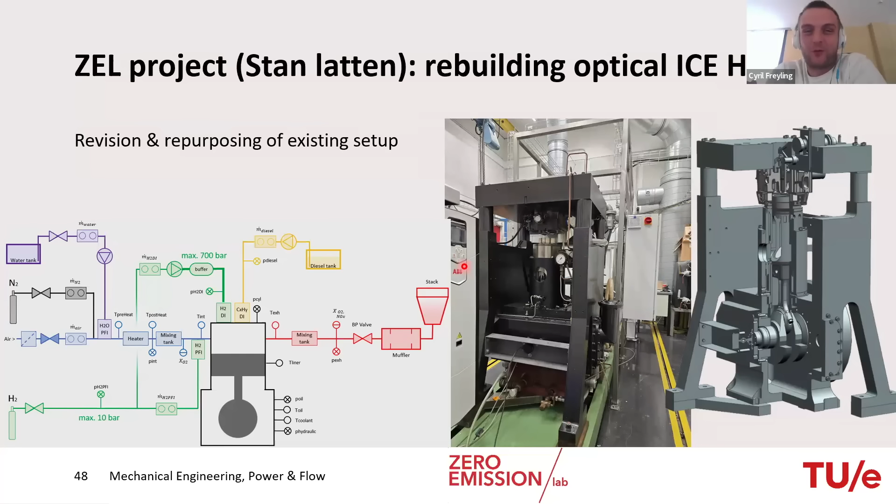Thank you. I don't know if I still have room for one small question. Go ahead. It's really a small one about the first study on the CHP that you mentioned. You mentioned that you did the 500 hours running. I guess you were running on the same operational condition. And in order to dynamically respond to a heat or electricity demand, would you consider changing those operational parameters? And would it be really interesting to sometimes sacrifice some electrical efficiency in order to have more heat efficiency?

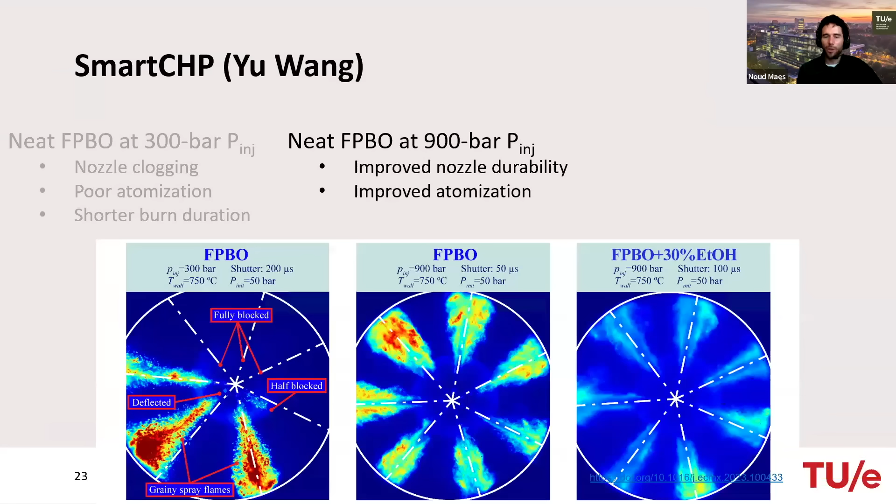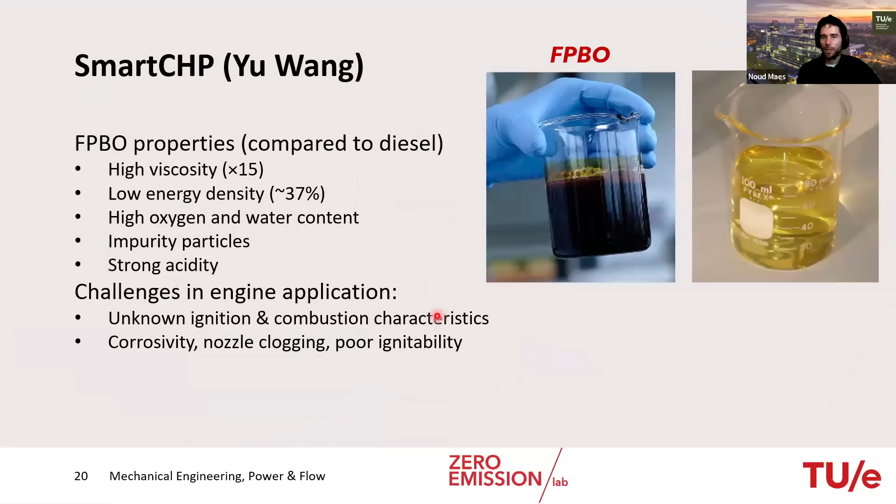But so the answer is yes. We tested the engine at different operating points, so different loads. That is not necessarily an issue, like it isn't with a typical diesel engine at the moment. Of course, it has its optimal running point, meaning that depending on the load of the engine, you will get a higher efficiency. So the best thing is, if you have a specific typical power output, to couple an engine operating at its sweet spot to that load. But it is possible to run the engine at different loads, of course, yeah, that's also what we've done.

Thanks a lot, it was really interesting. Thank you, Zvi, for the questions. I think it's always nice to have questions for our speakers at the end. For sure. Okay, I don't know if there are other questions.